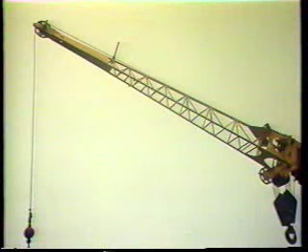Wire rope has attained worldwide acceptance as one of the safest and most efficient ways of coupling loads to crane hooks and other lifting devices. Like any tool or machine used in construction, wire rope must be handled by skilled, trained personnel. Number one priority when handling wire rope has to be safety, both for yourself and your fellow workers on the site.

When working with wire rope, wear protective clothing at all times. A hard hat, safety glasses, leather gloves, and safety shoes are all necessary to ensure rigger safety. The life expectancy of wire rope is often greatly reduced by improper storage and lubrication. Here we show properly stored wire rope slings, neatly oiled and hanging in a clean, dry place indoors. This prevents moisture damage and deterioration from dirt or other foreign materials which can abrade or corrode a cable.

This is how not to store slings. Not only would it be hard to find the sling you need in this mess, but you would have to seriously question the lifting ability of any cable found in this condition.

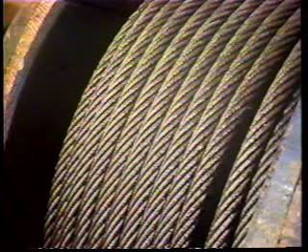When manufactured, rope is lubricated both internally and externally. This lubrication is intended for initial storage and protection during the early stages of the rope's working life. This initial treatment must be continued with additional lubrication at regular intervals, as prescribed by the rope manufacturer. Always check with the manufacturer of your wire rope to determine the type of lubricant and type of application recommended to attain maximum life.

Before talking about inspection of wire ropes, let's discuss the components of a typical cable. Wire ropes are made of basically three parts: wires, strands, and the core. The wires are twisted together to form the strands, which are then wrapped around the core to make the cable. It's important to know the difference between these terms to adequately understand what to look for when inspecting the condition of a wire rope. Another term you should be familiar with is one rope lay. One rope lay is defined as the distance it takes for a strand to make one complete revolution around the rope.

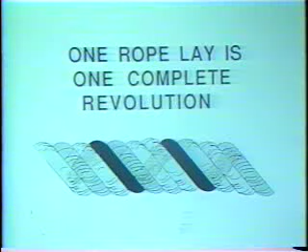Like cranes and other pieces of construction machinery, wire rope requires frequent inspections. These inspections are to determine if a wire rope is in suitable condition to perform the work to be done between scheduled inspections. Most government safety organizations in North America state that visual inspections should be done every 8 working hours, and that a thorough inspection should be done monthly. Accurate dated records of each inspection, noting damage, repair or replacement, and general condition should be kept on a current basis.

The first sign of rope wear is usually broken wires. It is not uncommon to find the occasional broken wire in almost any wire rope. This in itself is usually not cause for replacing the rope. Location of the broken wire should be noted in the inspection records and watched carefully for any further breaks.

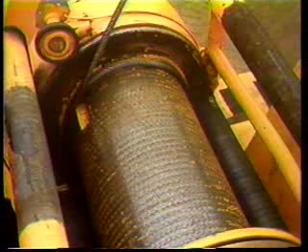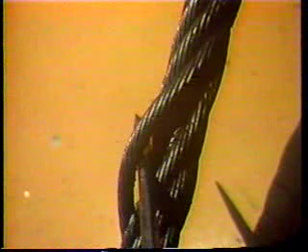Before inspecting a wire rope, you should first clean the rope so dirt and lubrication deposits do not hide broken wires or other damage. You must also remember to inspect the entire cable for damage. Make an effort to inspect the hard-to-get-at areas, such as the first few wraps on a hoist drum, or the underside of the outer strands and the core of the cable, which could have damage that is not always noticeable with just a quick look.

In running ropes that pass over sheaves or wind on drums, the rope must be discarded if there are 3 or more broken wires per strand per rope lay. It must also be replaced if there are 6 or more broken wires randomly spaced per rope lay. Remember, a rope lay is the distance it takes a strand to make one complete revolution around the rope.

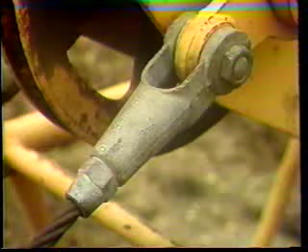For standing ropes or pendants, the rope must be discarded if there are 3 or more broken wires per rope lay. Again, the entire length of rope must be inspected to determine its ability to stay in service. Remember, taking a rope out of service too soon is wasteful, but keeping a rope in service beyond these requirements is unsafe and unlawful. Be sure to check all government regulations regarding wire safety and adhere to their standards.

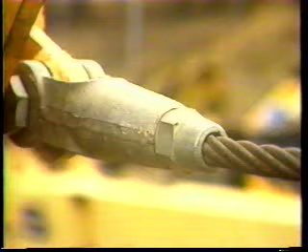Another important area of the wire rope to inspect is near a socketed connection. One or more broken wires near an attached fitting is cause to replace the rope or to renew the attachment to eliminate the damaged area. The reason this area is so critical is because a wire rope is a working machine. Load on and load off of a cable causes much movement inside and outside as the strands work. Near an attached fitting, movement is restricted, and wear, such as broken wires in this area, requires immediate attention.

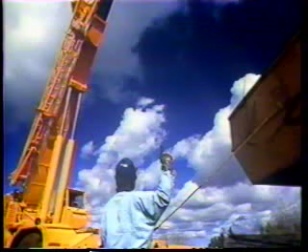In the last few slides, we have discussed broken wires in determining a rope's ability to stay in service. But broken wires are not the only criteria for removing a rope from service. A rope should be discarded if any of the following are noticed: kinks, core protrusion, bird caging, unbalanced wear, crushing, high stranding, or any other deformation of the cable which decreases its capacity.

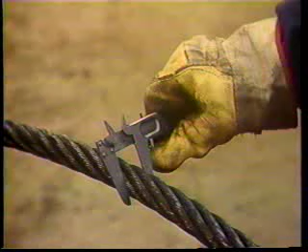Another part of a wire rope inspection is to check the size of the rope. Wire ropes are measured for length and diameter, where diameter is measured at the widest point of the cable. The length of a cable is important because excessive stretch will cause the diameter to decrease, which could make the cable unsafe for continued use.

Normal stretch, or construction stretch, is unavoidable, and some experts feel 6 inches per 100 feet is acceptable. If a cable stretches more than this, the diameter decreases to the point that strength is lost and the cable could be too small for the sheaves, resulting in wearing a rut in the support groove of the sheave.

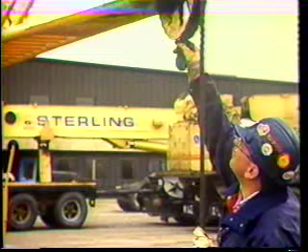Remember, before replacing a wire rope on a crane, you should check the sheaves for correct groove size, or nicks, or dents, which could damage the cable. Also check the sheave alignment so the cable is not rubbing on the flanges of the sheave. Sheaves should also be checked to see that they have the freedom to rotate easily. A stuck or stiff sheave can quickly wear out hoist cable.

Safety factors when dealing with wire rope are often abused and ignored, but mostly just misunderstood. All wire rope, when manufactured, has a breaking strength. By using this safety factor, we ensure that loads placed on a cable do not approach the loading limit that will break the cable.

Let's look at an example. A 1-inch diameter cable built by a leading manufacturer of wire rope advertises a breaking strength of 42 tons. When we apply a safety factor of 5 to 1, the usual safety factor for slings and chokers, we divide 42 tons by 5 to come up with a figure of approximately 8 tons. This amount, 8 tons, is what is commonly known as the safe working load, or SWL, of the cable.

Why do we need safety factors when using wire rope? Well, there are many reasons, but some of the more important ones are inaccuracies in load weight. Many load weights given to operators and riggers are mere estimates, and using a safety factor prevents us from loading a sling anywhere near its breaking strength. If you have doubts about the load weight, be sure to use a larger sling than appears necessary to ensure safety.

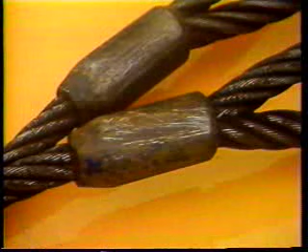Reduced strength due to bending over sheaves. Anytime a cable is bent around a corner, such as a sheave, the strength of the cable is reduced. The safety factor accounts for this loss of strength. It should also be noted that end fittings and attachments are not as strong as the cable itself. Some are only 75% as strong as the cable itself.

Let's look again at the equation for determining safe working load. SWL equals catalog breaking strength over safety factor. Safe working load is the maximum load that can be placed on a cable, and it must never be exceeded. There are many different safety factors for wire rope. We will look at and identify the ones necessary for cranes and hoisting.

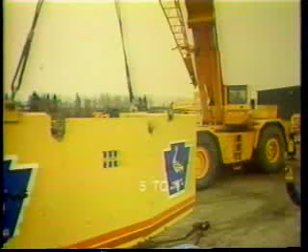Slings or chokers have a safety factor rating of 5 to 1 in material lifting situations. The factor is 10 to 1 when handling men, either in man baskets or other personnel hoists.

Running ropes, or ropes that pass over sheaves or wind on drums, have a safety factor of 3.5 to 1. This figure goes down to 3 to 1 in the case of a conventional crane boom hoist cable erecting the boom. It returns to 3.5 to 1 when the boom has been raised.

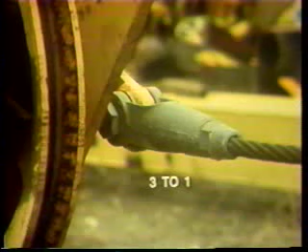Standing ropes, or pendant lines, have a safety factor of 3.0 to 1 with boom erected and 2.5 to 1 when the boom is being raised. All operators and riggers should know the safe working load of every cable they are using and should never exceed these safety limits.

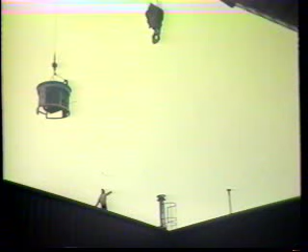A lot of attention has been given lately to non-rotating or rotation-resistant cables. These ropes are designed primarily for single-line use, such as a crane whip line, because they prevent a load from spinning uncontrollably while loading or unloading of the wire rope is taking place.

These cables are manufactured with the outer layer of strands laid in one direction and the inner layer of strands laid in the opposite direction. This type of construction causes the strands to counteract each other and prevents spinning of the load. It should be noted, however, that rotation-resistant cables require special handling to prevent damage, such as core protrusion.

There are many loading techniques that have been developed over the years. Let's look at the basic hitches, paying special attention to some good safety pointers. In the beginning of this presentation, we looked at how the condition of your sling affects its ability to perform to specifications. We can agree then that care must be used when rigging loads to ensure that slings remain in optimum condition for further use.

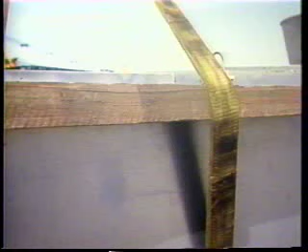One of the most common mistakes made is bending a sling around a sharp corner. This usually puts a permanent kink in the cable and has effectively reduced its capacity to 50% of its rating. Corners, or softeners as they are often called, should be used between the sling and the sharp edge to prevent this damage. The rule of thumb for going around a corner is to use at least one rope lay, or about 7 times the rope diameter. Anything less will cause permanent damage to the cable.

Resting a load on a sling or running equipment over them are other common causes of unnecessary sling damage. Treat them with care, and they will reward you with long, safe service. Overloading is another prime cause of sling damage.

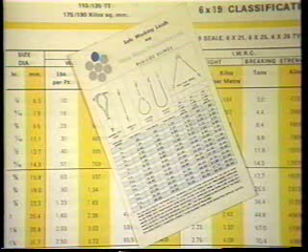By overloading a sling, you will damage it to the point of drastic capacity loss, even though it did not break at the time. An unsuspecting co-worker may attempt to use the damaged sling without being aware of its deteriorated condition, and an accident may be the result. If the sling has been damaged and is unsafe for further use, cut the sling in half with a torch to prevent further use that may lead to accidents.

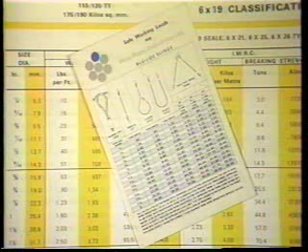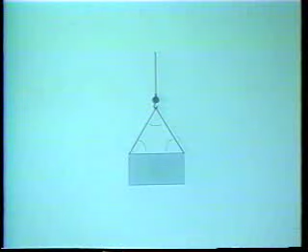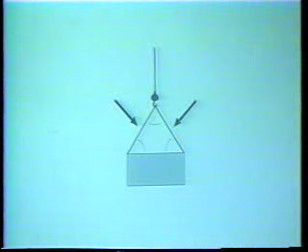A much overlooked area of rigging is sling angles. These are very important when determining what size sling is necessary to safely lift an object. Extra forces are generated on 2, 3, and 4-legged slings because of the tendency of the slings to pull together when loaded. We will see how the angle of the sling affects the forces generated on them by the load.

Here we have a 20-ton load suspended by a crane hook with a 2-point hookup and a low sling angle of 60 degrees. The letter F in the figure is the load exerted on each sling. Using a mathematical formula, we can determine F to be 11.6 tons at a 60-degree sling angle.

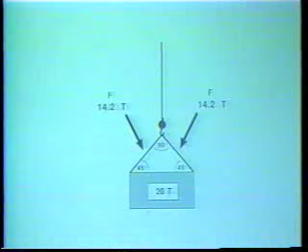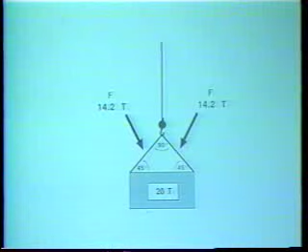Now, we'll take this same load and shorten our sling so the lower angle is now 45 degrees with the same 20-ton load. Using our formula, we can see F, the force generated on each sling, has risen to 14.2 tons per side, a dramatic increase.

We now take this one step further and reduce the lower sling angle to 30 degrees. Again, we use our formula to find that F is now equal to 20 tons per side. From this, we see that sling angles are crucial for determining what size sling will be necessary for a given lift.

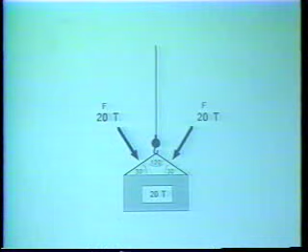Wire rope manufacturers provide detailed information in their sling capacity charts. These must be used and followed to the letter. A helpful way of maintaining inner sling angles of 60 degrees or better is to always make sure that the length of your sling, distance A, remains greater than the distance between them at the point of contact with the load, distance B.

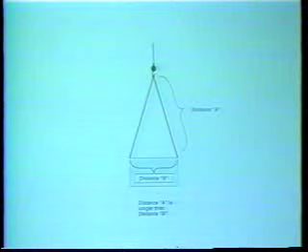Very often in load rigging, we are required to use more than 2 slings, and a set of 4-way spreaders is required. Since 4-way slings are often not self-adjusting, load weight is sometimes carried by only 2 of the 4 slings, with the other 2 simply balancing the load. For that reason, it is best to calculate the sling size required as though there are only 2 slings being used.

Wrapping a sling around a load and putting one eye through the other to choke the load is a common error found in many rigging operations. Use a shackle to connect the lower eye to the running line. This prevents damage to both the choker eye and the running line. Notice the position of the shackle pin. It should never be placed on the running line, as the pin could work loose.

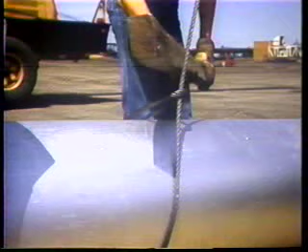Here is another practice which should be avoided. Never force the eye of a sling downward to tighten the hitch after tension has been applied. Damage to the sling is usually the result. Before attempting to lift any load, it is best to first determine the location of the center of gravity. This is the point on the load by which, if we lifted the load, it would balance perfectly. In other words, center of gravity is the center of the load by weight.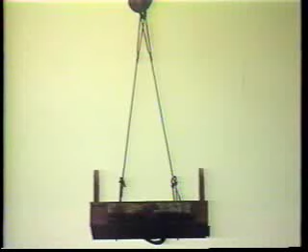In order for a load to be picked up without it rotating or flipping completely over, 2 things must be assured. The crane hook must be placed directly over the center of gravity, and the hookup points on the slings must be located above the center of gravity. Many accidents have been the result of failure to recognize these 2 requirements.

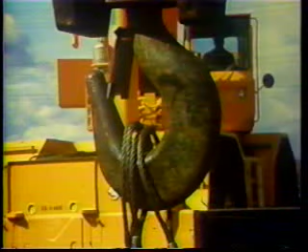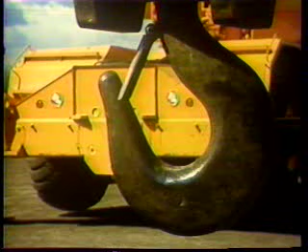One error we find on construction sites is the placing of 2, 3, or 4 slings onto one hook. This is an extremely unsafe practice. Hooks are designed to carry load in the widest part of the throat of the hook. Placing many slings on a hook has a tendency to open up the hook and weaken it to the point of failure. Always use a shackle when more than 1 sling is to be used in a rigging setup.

The ANSI B30.5 regulation states that hooks should be inspected at regular intervals for cracks and other deformations. It also states that it should be discarded if the throat opening has increased more than 15%, or when a twist of 10 degrees is found in any hook.

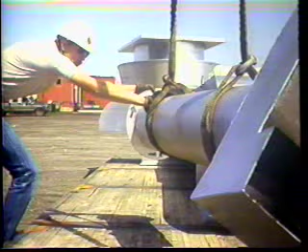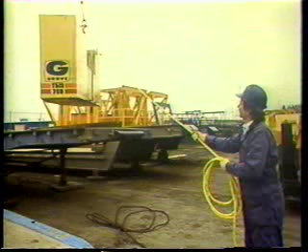Here we see another common error on the job site. The rigger is using his hands to guide a load. If you can reach out and touch a raised load, you are standing too close. In case of a rigging failure or an upset of the crane, this rigger's chance of escape is very small. Use a tag line to control movements of the load and maintain a safe distance at all times. It is also wise to plan an escape route in case of an emergency.

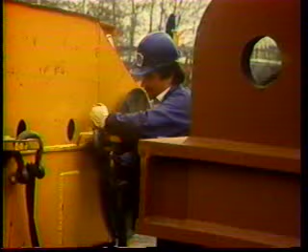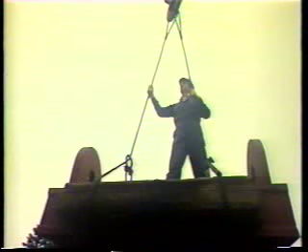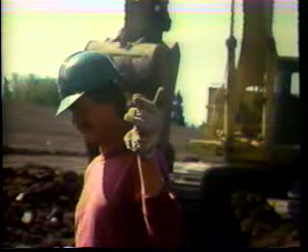Never stand between a hard object and a suspended load. You could be crushed if something goes wrong. Never walk under a suspended load. Never ride on suspended loads. It is very hazardous and against the law. Use the International hand signal system for directing movement of a crane load, and be sure to stand where the operator can see you and the load easily. Use only one signalman when moving loads so you don't confuse the crane operator.

The largest single cause of rigger deaths in North America is power line contact. Be sure to check with your local electrical utility whenever work is to be done in the vicinity of any power line. Never stockpile materials near a power line. You may be aware of the line location, but the next person involved may not. Use care and common sense.

This presentation has been designed to help keep your wire rope operating to its best potential and to show you safe rigging practices on a lift.